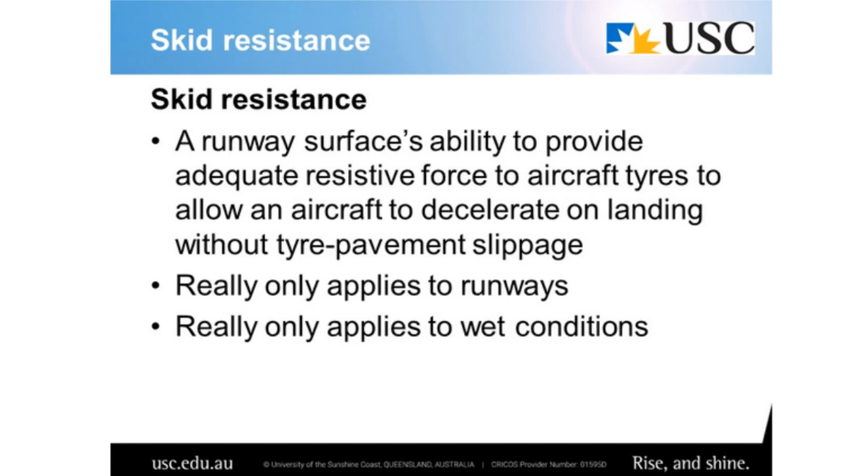What I'll talk about today really only applies to runways where speeds are high and braking forces are great compared to taxiways, aprons and other areas of the airport. And it really only applies to wet weather conditions, because pretty much any surface that we could imagine has a pretty adequate level of friction when it's dry.

In terms of surface texture, another important definition - texture is really the physical roughness or unevenness of the surface. In the friction and surface texture world, it's defined from a pavement perspective as either micro, macro or mega texture. I highlight micro and macro in green because they're the things that really affect aircraft skid resistance. Mega texture, not so much.

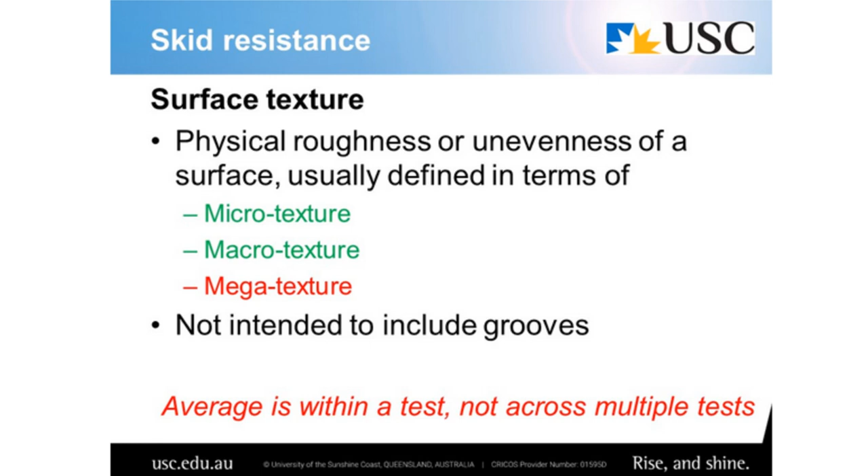It's certainly macro texture, which is probably the one we talk about most often, that is not intended to include grooves. So even though sometimes we think of grooves as being artificial macro texture, the FAA and NASA, who developed all the rules around grooving and friction and everything else pretty much to do with airport pavements, it was always their intention that we shouldn't include grooves. There are some very good reasons, probably beyond the scope of today's discussion, for excluding those.

Bit of a picture, it's got a bike instead of an aeroplane, but the principles are the same. At the biggest wavelengths, you've got roughness, which is really about am I going uphill, downhill, or am I feeling a bump? Then down from there, you've got mega texture, which is about whether the surface feels uneven or corrugated, whether I can feel the vehicle or plane vibrating as I'm going down the pavement. That's mega texture, not really what we're interested in today.

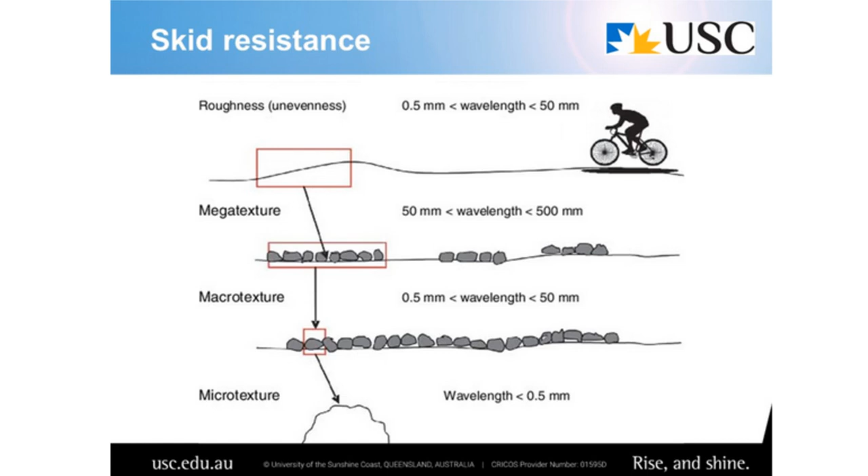Then we've got the macro texture, which is really the spacing in and around the particles. And then the micro texture, which is actually a characteristic of each individual particle itself.

So moving from surface texture, which is a very physical thing you can see and is a bit easier to measure, to friction. Friction is the force that resists the movement between two bodies that are in physical contact. It comprises static friction, which is essentially if something was sitting still when you tried to push it, there'd be some static friction. Once you get it moving, there would also be some kinetic or dynamic friction.

One really important thing to get your head around is that friction doesn't change because there's moisture present. The actual friction inherent in that surface is still 100% there, it's just being blocked or hidden by the presence of moisture. So when we talk about a friction test on a runway, we're not actually measuring true friction - we're measuring the effective friction, taking into account the 1 millimetre film of water we're putting on the surface immediately prior to it. It really is friction minus the effect of moisture, as opposed to true friction, which would need to be tested in a completely dry situation.

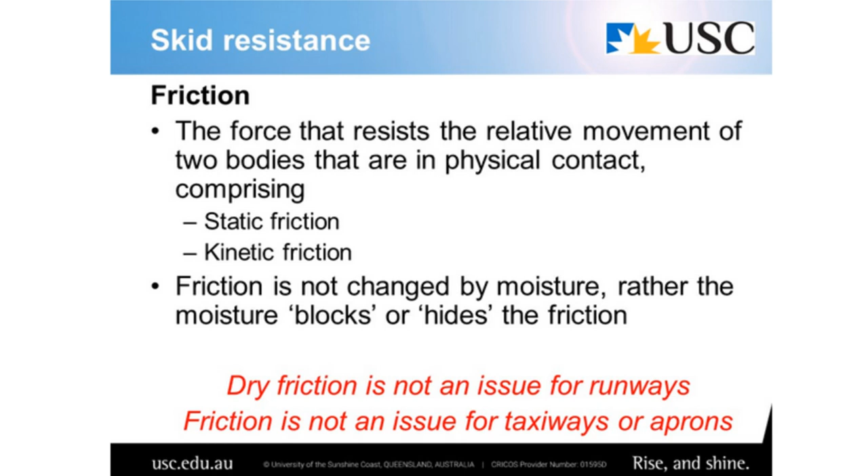As I said, we're really talking only about runways, and we're really not talking about dry conditions - we're talking about wet conditions when we talk about friction and skid resistance on airports. So a bit of science, and for those who don't like this stuff, sorry - I'll try to make it easier, I've got lots of pictures, so hopefully that'll help.

So micro texture, the very small texture, actually provides friction by the interaction of the asperities. Asperities is just a technical term for the very small microscopic unevenness or protrusions between the two surfaces. Every surface has them - it's just a matter of how far they stick out and how frequently they occur that effectively makes something rough or smooth to touch. That really comes from the aggregate particle surfaces, so the individual particles.

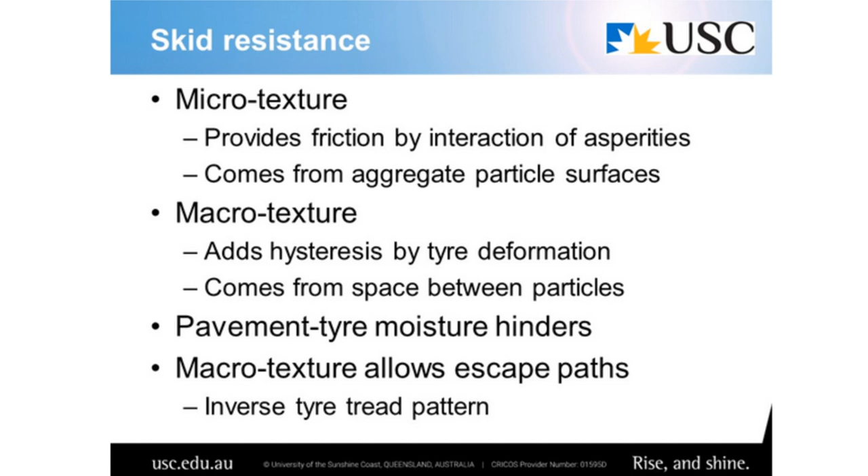Macro texture also contributes to friction by hysteresis, which is essentially how the tyre bends around the unevenness or the macro texture in the surface. It's provided by the space between the particles, as we've already talked about. We know that pavement moisture hinders friction, and we also know that the macro texture allows that moisture to escape. So think of macro texture as being the inverse of the tyre tread on any tyre, which allows that water to escape from between the tyre and the pavement surface.

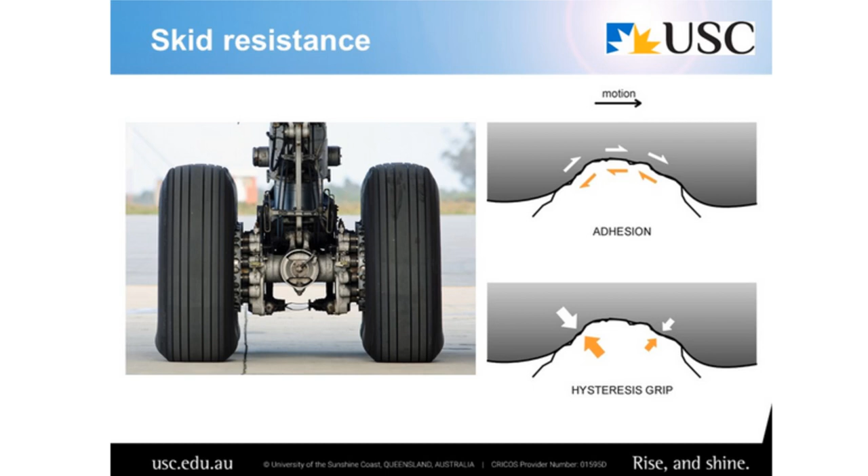Typical aeroplane tyres - you can see that the tyre tread, unlike our car and even my motorbike tyres, is circumferential, so it runs around the tyre rather than transversely across it. A couple of images on the right-hand side show this idea of adhesion being effectively the force resisting the movement of the tyre and the pavement surface or particle, and then hysteresis being how the tyre bends around that little particle or lump in the surface.

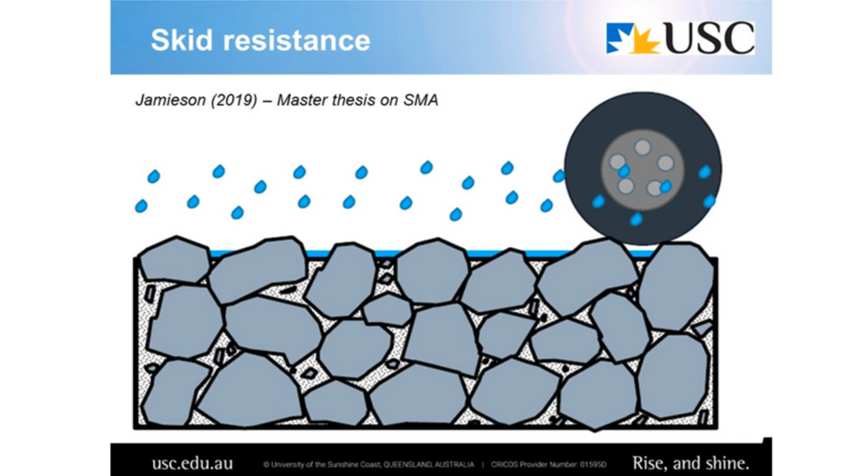But really what we're talking about is how much water or moisture we've got between the tyre and the pavement surface, and how much that effectively hides the friction that's available. How do we test these things? We're reasonably rudimentary, but we do our best.

The sand patch test, in terms of macro texture, only measures macro texture - it doesn't measure friction. We end up with this sand circle using a controlled amount of sand; the bigger the circle, the less texture there is.

In terms of friction, we can use this device called a British pendulum. It effectively does a spot test. We do pre-wet the surface, but it's extremely difficult to control. It's a dynamic friction test, relatable to micro texture, and to a small extent, if we do it wet, to macro texture, because that gives us an idea of how quickly the moisture moved away from the surface. You'd like to think that the pendulum plus the sand patch test result would give you a pretty good feel for what friction levels or skid resistance levels you've actually got on your runway.

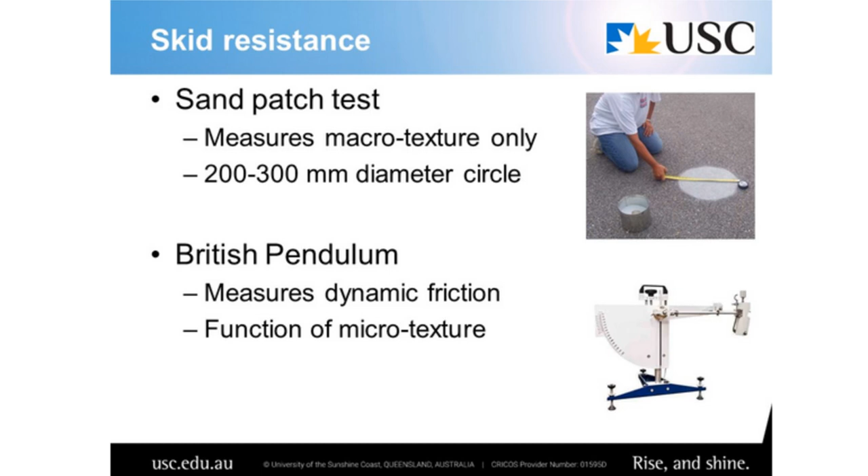I'm not quite convinced that is necessarily the case.

Grooves are the other thing most of us would be familiar with. It's artificial or synthetic texture, and it also provides a path for the water to escape between the tyre and the pavement. It's not really for general pavement drainage, so just because you can't see the water doesn't mean your grooves are or are not being effective.

Traditionally grooves have been 6 millimetres by 6 millimetres at about 38 millimetre spacing. Interestingly, the UK has smaller grooves at tighter spacing. In the USA in the last few years, trapezoidal grooves have become more and more popular. They have larger volumes of grooves at greater spacing to effectively provide the same amount of volume.

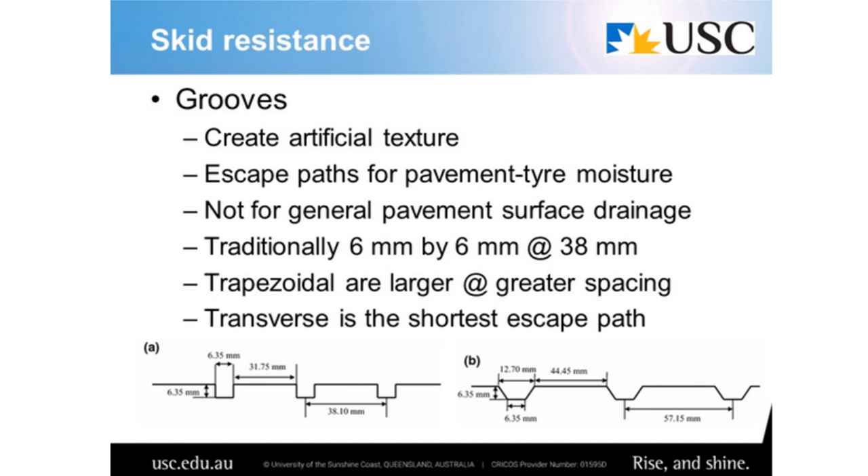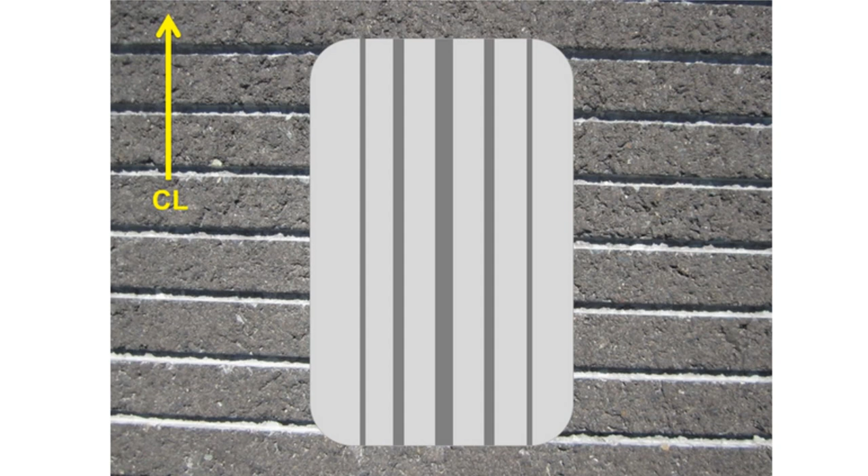People quite often ask why they saw transversely across the runway, and it's really because that's the shortest escape path for the water. Here's a photo of a real runway surface - imagine that's the tyre contact, and you can see the tread patterns consistent with how we saw them on that actual aircraft tyre running parallel to the runway centre line. So the shortest path for the water to escape is transversely across the tyre, which is why the grooves are sawn in that direction.

In terms of skid resistance, what we're really interested in is the effective runway friction, because that's the skid resistance our surface will provide to the aircraft. I always think of that as being equal to the actual friction - the friction available in the complete dry - minus whatever reduction the moisture is causing.

We know that our friction test is a wet or effective friction test. These are continuous friction surveys we're talking about. The degree of wetness is very specific - effectively a 1 millimetre water film placed on the surface just in front of the test tyre. It's at very specific vehicle speeds, 65 km/h and 95 km/h, noting that aeroplanes typically land at about 180 km/h. So we're still quite a way from the actual speed aeroplanes typically land at.

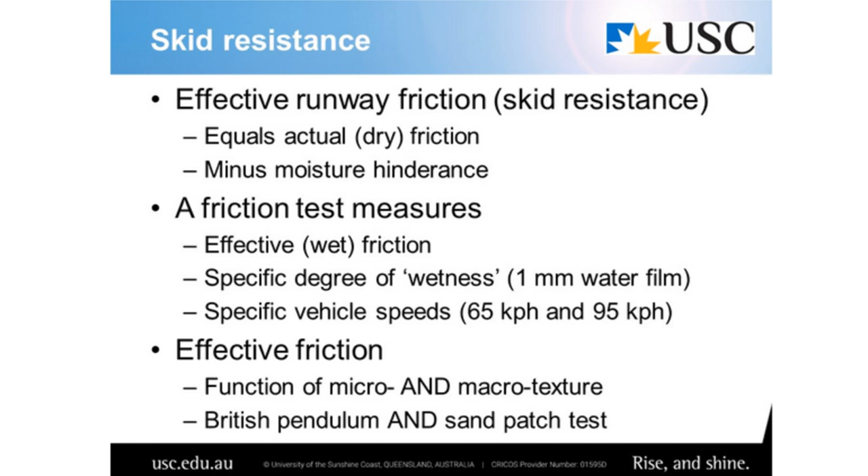If you think about the effective friction as a function of the micro texture and the macro texture - you might like to think that one day we could relate a British pendulum and a sand patch test, which would be a lot easier and quicker to perform than a full-length friction survey. We might be able to combine those two results to calculate the effective friction, but we're certainly not there yet, and I'm not sure we will be anytime soon.

The reason we test at two different speeds is that speed is important to the results of the test. The quicker you go, the more the water will hinder or impede the friction available, and the lower the results will be. So at low speeds, the water has plenty of time to escape, and you can achieve almost your full friction if you go slow enough.

But at high speeds, the water doesn't have time to escape, so the amount of reduction from the true friction to the measured friction is more significant. The more macro texture you have, the more efficiently the water can escape, and that amount of reduction will be less and less.

That's why it's critically important for runways that we test our friction wet and fast, which is why you've got the 95 km/h test with the 1 millimetre water film just in front of the tyre.

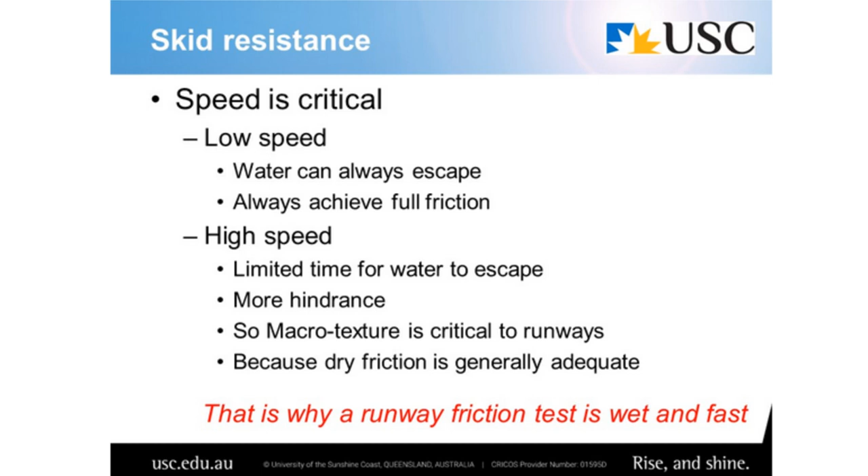A typical friction survey, for those who haven't had one done at their airport or stayed up until 3 o'clock in the morning to see one being done, is typically at 65 and 95 km/h, 3 metres and 6 metres each side of the centre line in both runway directions - north and south if you're a north-south alignment - giving you full 8 runs, full-length runs of your runway, plus a couple of calibrations. There are currently about 9 different machines approved or endorsed by ICAO for performing those tests, with 2 or 3 different machines in Australia. Most of the test results I've seen have been done using a grip tester, but there certainly are others around, and they have some pros and cons, but we won't delve into that today.

Typically you'll get your report giving you an average for every 100-metre length of your runway. So if you've got a 3-kilometre-long runway, you'll get 30 100-metre results. If you've got a 1,500-metre runway, you'll get 15 100-metre results. Quite commonly, you also split the runway into thirds, which is effectively touchdown zone, central portion, touchdown zone, and that reflects the significant impact, particularly at busier airports, of tyre or rubber contamination and build-up over time with repeated landings in the touchdown zones.

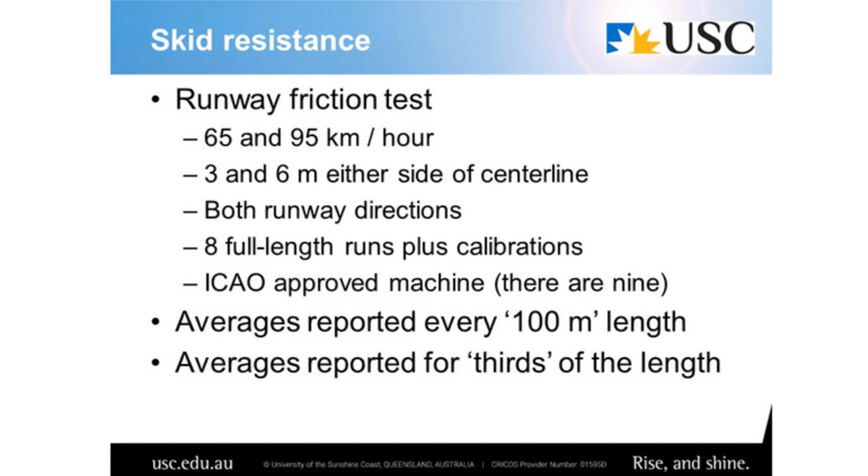It's important to understand and recognise that test temperature has a significant effect on the results. You'll get swings from nighttime to daytime tests, and you'll also get swings from summer tests to winter tests of the same surface, even in the same condition, because of the different temperatures, which primarily affects the hardness of the tyre doing the test.

The tyre condition can affect things as well. A worn-out tyre versus a new tyre can have a significant impact on the results.

And of course, your surface will change over its lifetime, hopefully 12 or so years, maybe 10, out of a runway surface. In that time, the friction that it provides or possesses, certainly the wet friction or the effective friction, will change as well. Specifically, if you don't treat by removing rubber, then you get more contamination. You might do a preservation or rejuvenation treatment. And even if you had no traffic, you would still change over time just because of the oxidation and ageing of the surface.

The FAA and ICAO tell us we should ignore the last 150 metres of the test, because you could imagine getting up to 95 kilometres an hour from a standing start at the end of a runway takes a bit of time. So that last 150 metres is generally omitted. And of course, the 150 metres at the other end, where the vehicle is slowing down before it runs over the end of the runway, which quite often has lights if you're at a regional airport, elevated lights. So you've got to take those last 150 metre segments with a grain of salt.

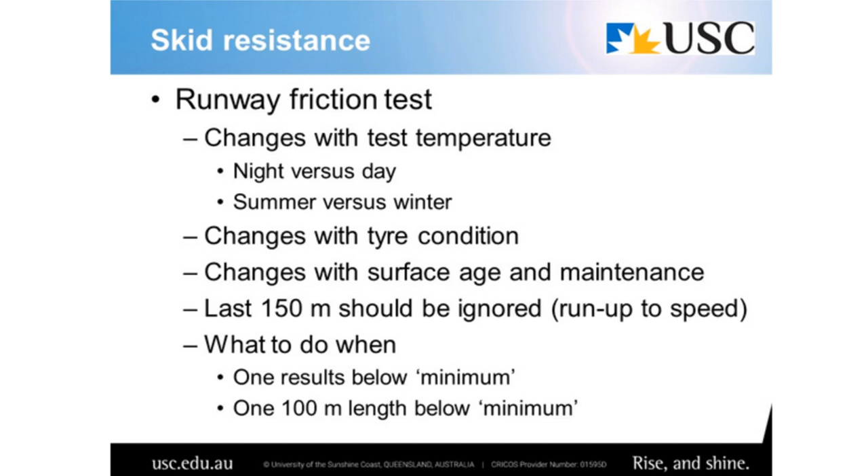There's always a question about what do I do if I get one bad result. What if I get a 100 metre length with an average bad result? Do I shut the runway? Do I put out a NOTAM? What do I do? So they're all the challenges and the practicalities, because there's no clear, hard rules around what you do in those circumstances.

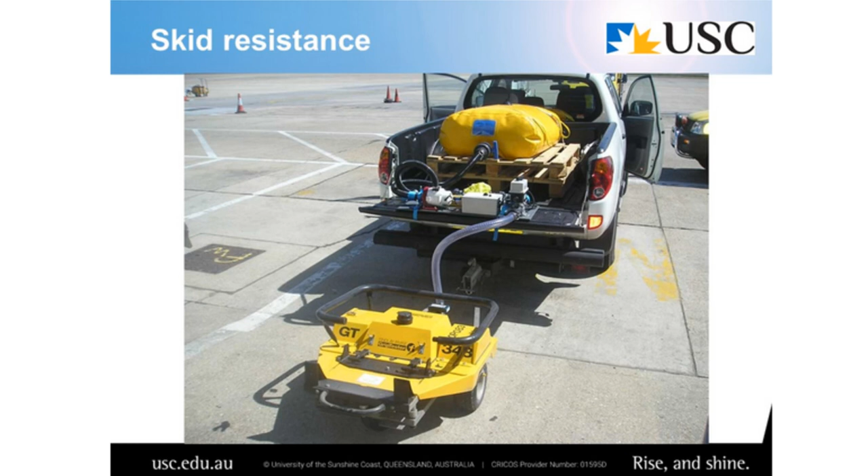For those that haven't seen one, that's the unit. So you've got basically a big yellow bladder full of water in the back of a ute. You've then got this little trailer with a semi-fixed wheel and a few smart sensors. It's all hooked up to a laptop computer. The water gets put on the surface just before the wheel that's under the little yellow trailer at the back, and then the computers do the rest, essentially, and that's probably all you and I need to know about the system.

Here's some typical results. They happen to be from Brisbane Airport. You can see the three lines: red for minimum, yellow for better start thinking about intervention, blue is all good, and then the very orange line right at the top is effectively what you might expect from a brand new surface. You can see there some dips in the touchdown zones, and that kind of data is what prompts rubber removal on a periodic basis at some of the larger airports.

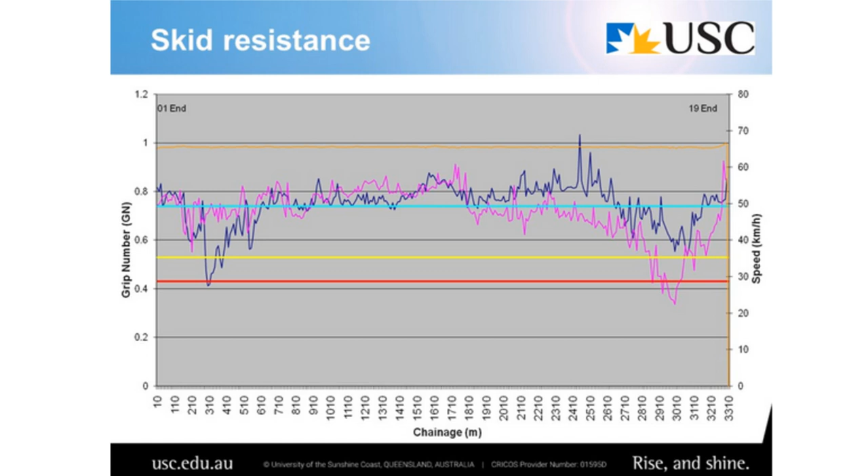Some other things that I personally think we should be taking into account when we're making decisions about friction and surface texture and skid resistance is the length of the runway versus the aircraft. I quite often say if you're landing Saab 340s on a 4 kilometre long runway, you're not going to have to worry too much about skid resistance, because that plane is very unlikely to ever have to hit the brakes hard.

Similarly, if you live in a place where it rains a lot and it rains heavy, then you're going to have a thick water film on your runway quite often, compared to if you live, let's say, in the centre of the country where it doesn't rain very often, and so your risk profile would be significantly different.

You could also wonder about runway crossfalls, and if you're in a runway intersection or the intersection between two runways where your crossfalls are always going to be quite low and effectively a flat spot, then that presents a different level of risk, again, because the water won't drain as quickly, which means you'll end up with a thicker water film than you might otherwise, compared to if you've got a very high crossfall, 1.5 or 2%, which you might typically have on the rest of your runway.

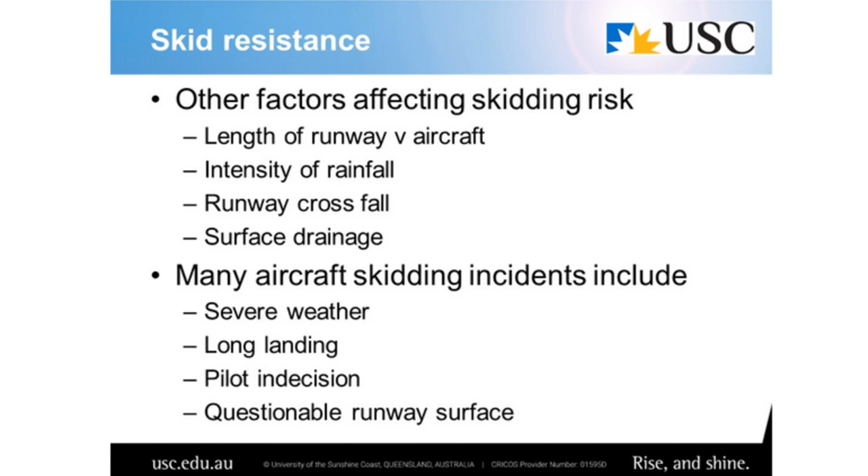So, regulations - what are the rules around all this? I think it's fair to say, and there are a couple of CASA people on the webinar who I don't think would argue, because we've had this discussion numerous times, that the current MOS isn't as clear as it could be in relation to some of these issues.

My simple interpretation is you've got to have a millimetre of surface texture, which you'll get from a spray seal, you won't get from ungrooved asphalt. Or you've got to groove it. So effectively, if you've got an asphalt runway, you're probably going to need to groove it because you won't have the one millimetre surface texture. Or you need to demonstrate and maintain your wet friction level above the ICAO minimum values, which are published in the MOS.

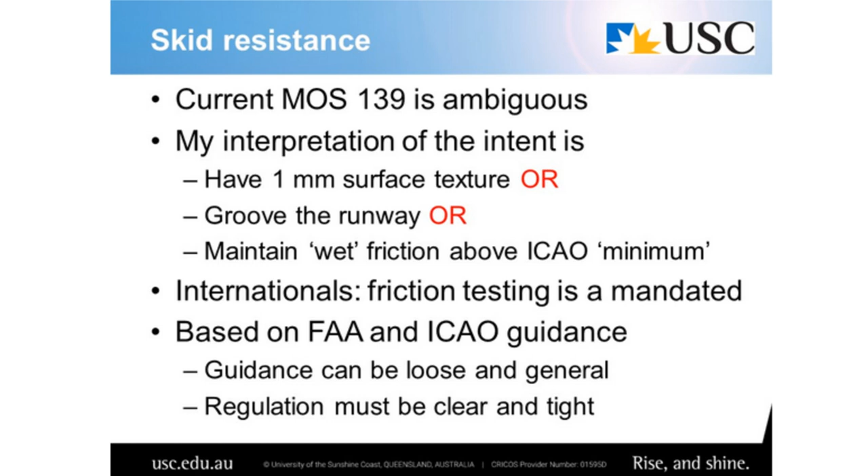It's worth mentioning that more and more airports are telling me that their CASA inspector is asking for evidence to support one of those methods of compliance, which probably hadn't occurred as often in the past. So that demonstrates how important skid resistance is, and that from a regulatory perspective, it's certainly on the inspector's radar.

In terms of the new MOS, it's made a good attempt to try and address some of the ambiguities. I'd say it's gone a long way to resolving some of these things. There is probably some frustration because of the way lawyers want things worded, and the perception of risk - in a lot of ways unknown risk - because, to be frank, we don't really know the risk of not complying. So if the risk is very difficult to calculate, it makes it hard to objectively change the rules, because you're changing the level of risk without knowing the current level of risk, if that makes sense.

But there are a number of significant improvements in the new MOS. It does a much better job of recognising those three means of compliance: surface texture, grooving, or friction testing. So that's a great thing - that's now quite clear, or much clearer than it was.

Based on some FAA guidelines around what a minimum surface texture should be as opposed to a new surface texture, the one millimetre has been reduced to 0.625 millimetres, which I was a little surprised by, but this probably recognises that we'll hit one millimetre when we're new, but things will change over time, so that's probably a good thing.

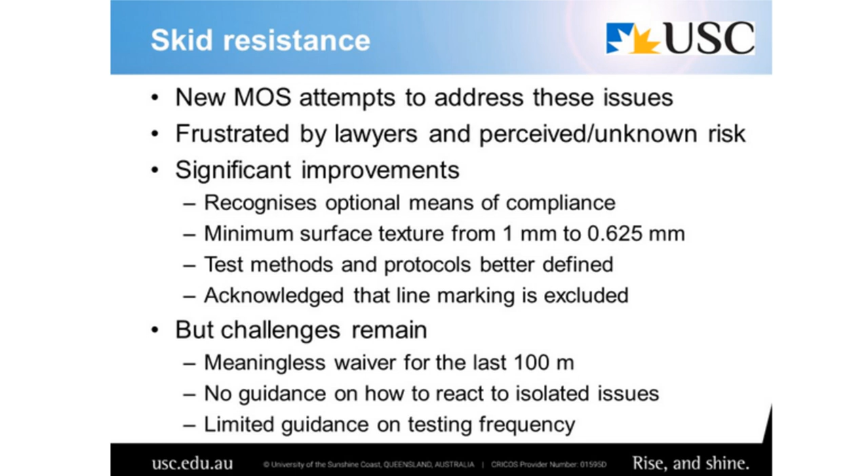Ian's just made a comment, thank you Ian, that if you're below minimum levels, then you should raise a NOTAM and do something without delay. I don't think anybody disagrees with that, I think everybody absolutely agrees with that. The question is, what if I've got a 3 kilometre long runway and I've got an average of 100 metre results, then if one of those is marginally below and the other 29 results are perfectly good, do I react in a different way? I think the answer would be yes. Then if, say, 50% of my 100 metre average results were questionable or below the minimums, I think that's where the lack of clarity perhaps sits.

But that's okay. In terms of some of the practicalities, well, we've got a couple more questions, so we might try and do those before we go on to some of these practicalities.

Would you agree that the new MOS would better support a dense graded runway not being grooved, assuming that it meets the current levels? And would I have any concerns about grooving a 3-year-old surface?

So the second question first, I think in the long term, I'd be very concerned about trying to groove an 8 or a 9-year-old surface. 3 years perhaps is certainly less concerning, particularly from a ravelling and surface tightness perspective. 3 years, probably okay. 8 years, probably not okay. What's the transition from one to the other? Don't really know, but your gut feeling says you'd have to look at this particular surface to make a call on how eroded it was.

In terms of the new MOS, if you accept my interpretation of the current MOS, I don't think it really changes significantly whether or not a dense graded runway should be grooved, because my interpretation of the current MOS is that if you're willing to get a friction test every 12 months or every couple of years, depending on what you think is the appropriate frequency, then I don't read the current MOS as requiring you to groove, as it currently stands, unless there might be some caveat around being an international airport. So no, I don't think it makes much difference.

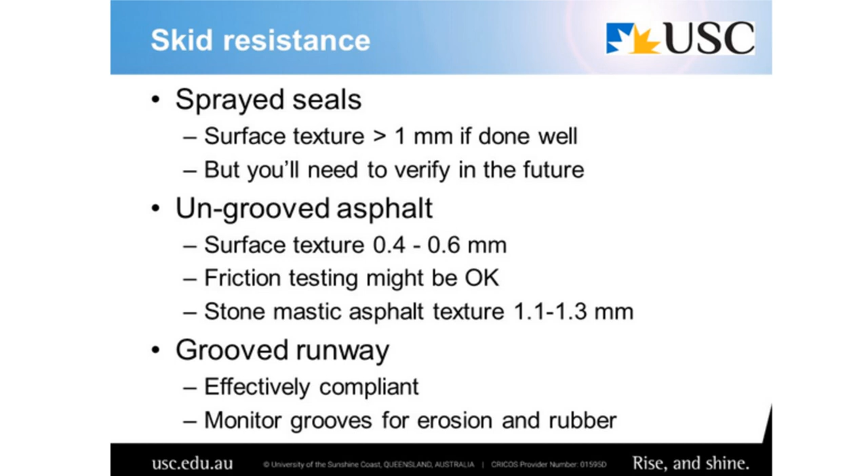So back to some of this practical stuff. I think what not to do is just as important as what I think you should do.

My suggestions are: don't resurface your runway with asphalt without thinking about surface texture or friction and how you're going to comply. Because, as I said, CASA inspectors are asking more often about where's the evidence of compliance, which is a fair thing to ask, so you're going to have something in place to be able to answer that, and it'll have to be evidence-based.

And I think the new MOS clears that up quite a bit about what that evidence can be.

Don't average the texture you measure in your flushed wheel paths with the texture you measured on the edge of the runway and say, well, on average, if I take those bits and add them together, I'm okay. Because really, the aeroplanes need the bit in the wheel paths, but they don't rely as much on the bit on the outside of the runway. And yeah, I've actually seen reports where that's been done, and it made me shake, to be honest.

Don't contemplate a rejuvenation or some other treatment of your surface without thinking about how you're going to control, manage and verify your friction as part of that process. But I also don't think you should overreact to one low result. Remember, a friction test result can be affected by the temperature, the time of year, how worn the tyre on the machine was, how fast the person who was supposed to be driving at 95 kilometres an hour actually drove.

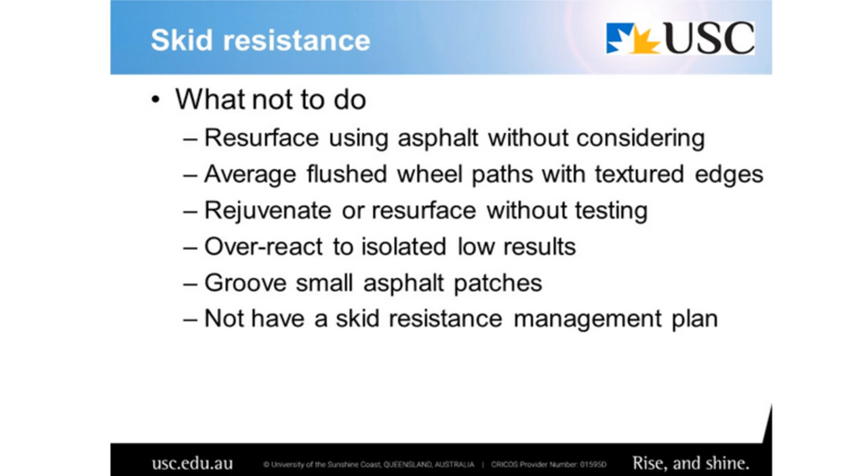But most importantly, don't not have a skid resistance plan of some description. It only has to be a couple of pages, detailing how you comply, what your current results are, and what your next step should be. I've seen a few airports put that little plan, which is pretty simple, into their airport manual, and then when their CASA inspector or AGI inspector comes around to do their duties, it's sitting there with all the rest of the airport operating documentation, making it clear how the airport is managing skid resistance, whether that be by friction, by grooves, or whatever the case may be.

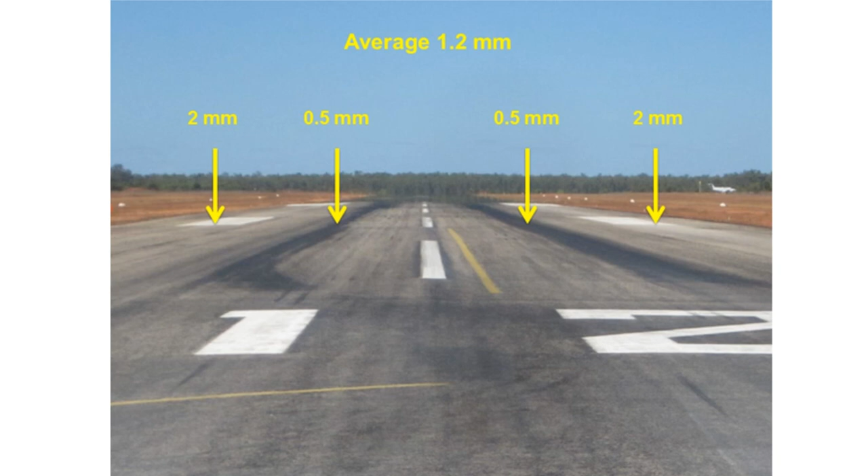It's just a photo, this actually came from that report I was talking about. They had 2 millimetres of surface texture on the edges and 0.5 in those two wheel paths, and that was somehow given a weighted average of 1.2 millimetres and given the green light, which I thought was highly inappropriate and not the intent of the current MOS or the new MOS, despite the fact that the wording in the current MOS around the term average surface texture probably isn't as clear as it could be, and certainly that's been cleared up a bit in the new MOS.

Unanswered questions, I think there's a couple. When reviewing friction results on a grooved runway, should we take the zone average as an optimal number of where to remove rubber? So I think the question is, do you necessarily remove rubber from a 100-metre section, and how many of those 100-metre sections should you remove it from? My view would be that where you start and stop your rubber removal would primarily be based on a visual inspection of where you've got rubber contamination.

And given that as much of the cost of rubber removal is about getting the machines there as it is about doing the actual work, I think you would take a conservative view and do more, not less, because by the time you've got them there, it's probably not that expensive to do an extra small bit.

Jess from Adelaide asks, how small is too small to groove an asphalt patch? Well, as I said, the FAA provides some guidance on that. I think their terminology is something like, from memory, if 500 feet, which is about 150 metres, of your runway has grooves that are less than 40% of the volume they're supposed to be, which is what an asphalt patch would be because there'd be no grooving volume, then you need to consider that as an issue.

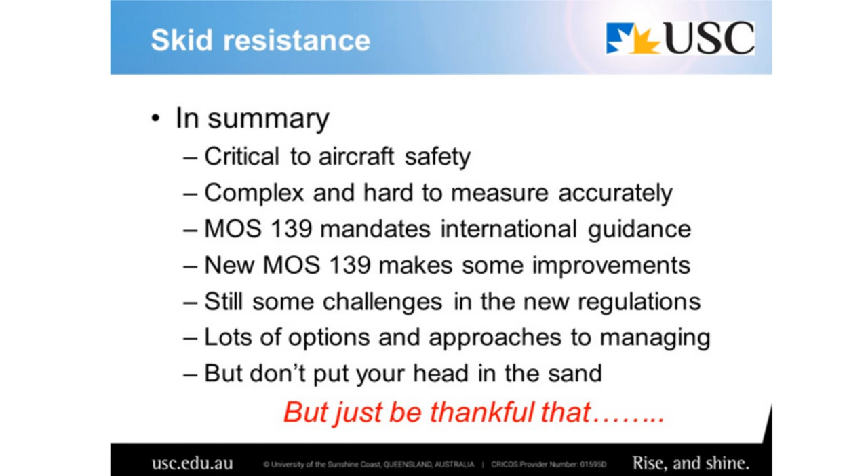This is the point that I always say: we should all just be thankful that it doesn't snow on our runways. Because whilst we've got to deal with water and friction and those kinds of things, we don't have to deal with contamination from snow, and that's got to make our lives a heck of a lot easier.